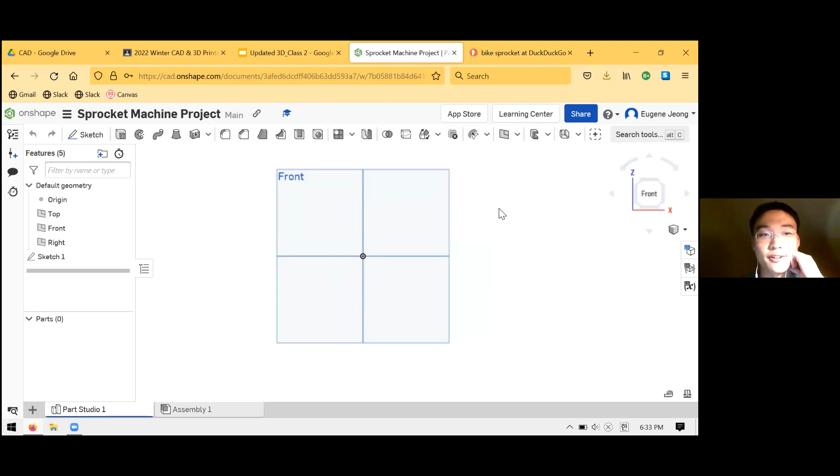What's the first thing that we do when we want to create a part in a part studio? Sketch. Great. Thanks for answering. Feels like I'm in a real classroom or something. So we create a sketch.

I thought we were using the top plane. You could. It doesn't really matter that much. In some senses, the only thing that'll really have an effect on is when you bring your part into your assembly, it'll by default orient it in the same way that you have it oriented in your part studio. So I'll probably just do front, because that'll make it horizontal instead of vertical. At the end of the day, it really doesn't matter. It's a matter of preference at this point.

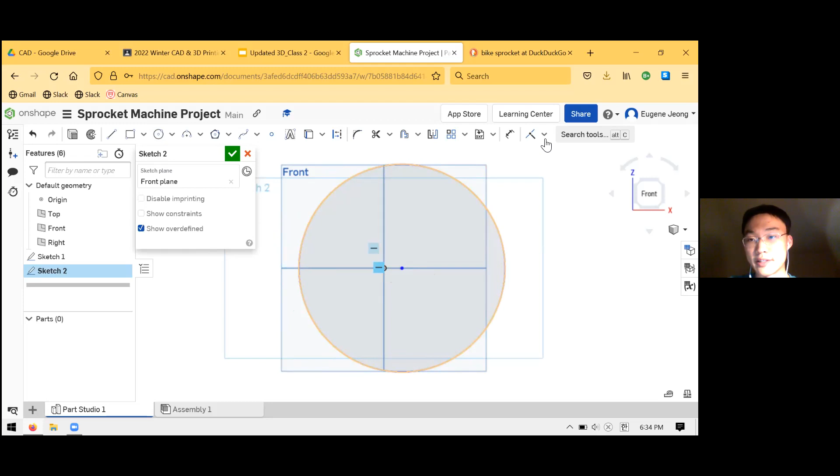And the body of the sprocket, as we talked about last week, it's going to be a circle. You can see I missed the center there, but I'm going to put my circle center on my origin. And that's using my relations, specifically the coincident relation. How big is the circle supposed to be? Great question. On a real bike, you'll probably see it's going to be a couple inches in diameter. It really depends on what the sprocket's being used for. And since this is just a machine that doesn't do anything, it's really up to you. So feel free to pick any number. I'm going to pick some made up numbers. You can use the same ones, you can use your own.

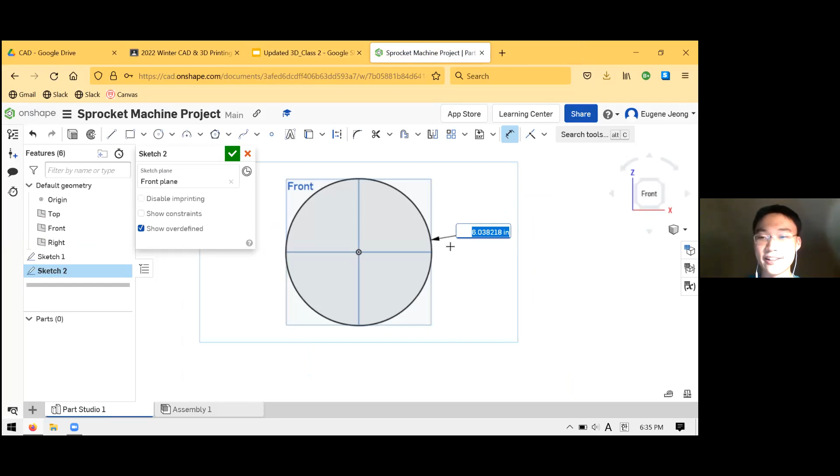It doesn't really matter. The only time the dimensions will start to matter is when we start making other parts after the first part, because then we need to make sure that these parts will actually be able to fit together. And that's where we need to make sure our dimensions are logical with respect to each other. But right now, since we're starting on a fresh new page, there's really no restriction. Maybe I'll make it 3 inches, which would be like this big in real life, thereabout. Wait, 3 inches? My default units are in inches, as I may or may not have mentioned. Mine's so small.

And from here, now we're gonna look towards the second part of the sprocket. Oh, mine is in centimeters.

What you can do, I believe, is specify the unit you want by typing in either IN for inch or cm for centimeter. So for example, if my default units are in inches, but if I wanted to type something in centimeters, I could type in 2 cm, and that will automatically convert it to inches. So 0.787 is 2 centimeters. I believe it also works for meters or millimeters.

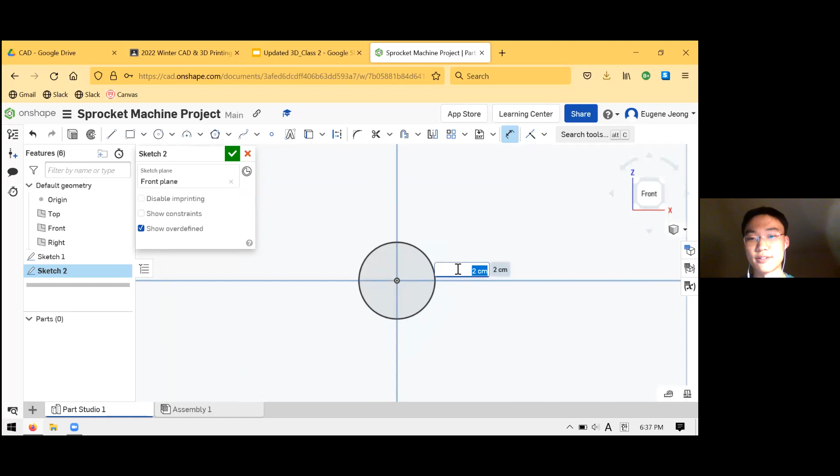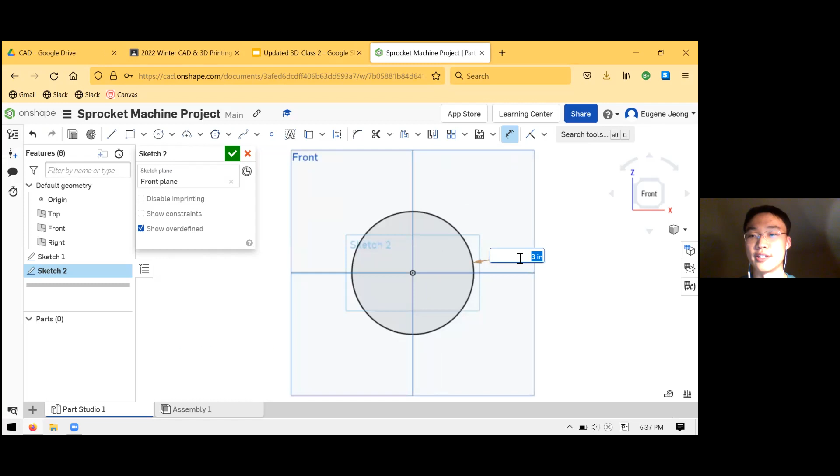3 inches is 7.62 centimeters. Or that was just an example. No, because I put in 3 IN and then it said 7.62. In that case, it probably is that. Let's find out. There you go. 3 inches is 7.62 centimeters. Okay. Yeah. And that's a common feature in most CAD programs where you just type in a unit and you don't have to convert it yourself. The program will just take care of it. So good thing to bring up.

So the next part, now we're going to think about how we're going to put the teeth on this sprocket. The hint that I gave you last week was that we're not going to model every single tooth on the sprocket because that would be really annoying. We'd have to do the same thing maybe dozens of times to create our part, and we'd have to create all those relations, all those dimensions. It would not be worth it. No one would ever design sprockets.

Can you just create one triangle and then when you put it in the assembly, you duplicate it a ton? Almost. It's a similar idea, except the duplication part, as you call it, is going to happen entirely in this sketch. So what we're going to do is sketch just one unit of the thing that we want to pattern, which is the tooth of the sprocket. And that's kind of like a triangle shape, maybe just a pointed part.

And to make that, I'm going to use my line tool. There's a lot of different ways that you can go about this. I'll draw some lines and I'll explain how I'm thinking about it. You're free to try your own method, depending on what feels the most right to you. But for now, let's just try making 2 lines that'll form a single tooth, a single unit of the sprocket.

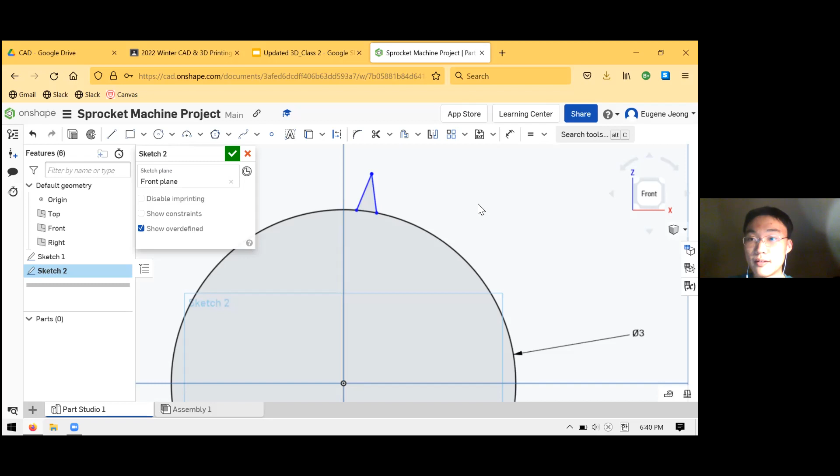I meant, how do I make it equal to the next triangle? Wait, what does copy sketch entities do? I guess it depends. I'd imagine it's similar to a copy and paste function on anything else. So you create a second version of the thing that you copied. Oh, yeah.

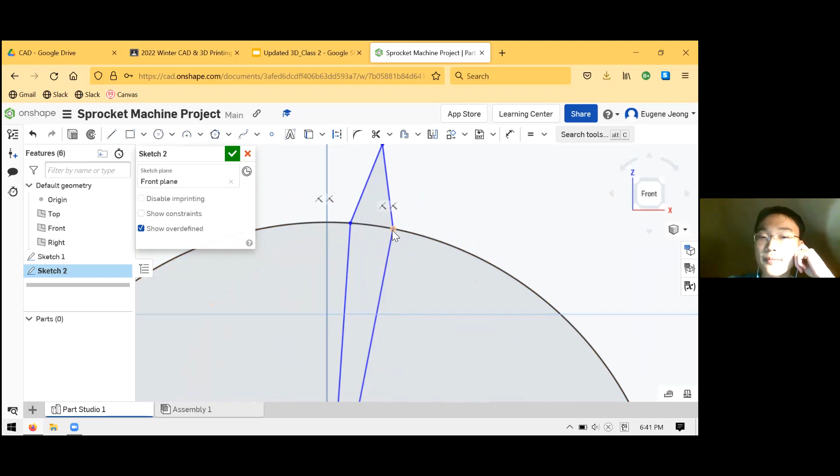So we'll make one of these triangles, and then I'm going to do something that may seem a little odd, but I'm going to create another pair of lines that go from the center of the circle to the points on these triangles where it meets the circle. So I kind of created a bit of a kite shape here. Why do you have a kite shape? And the reason I do that is... So are we supposed to make a kite shape?

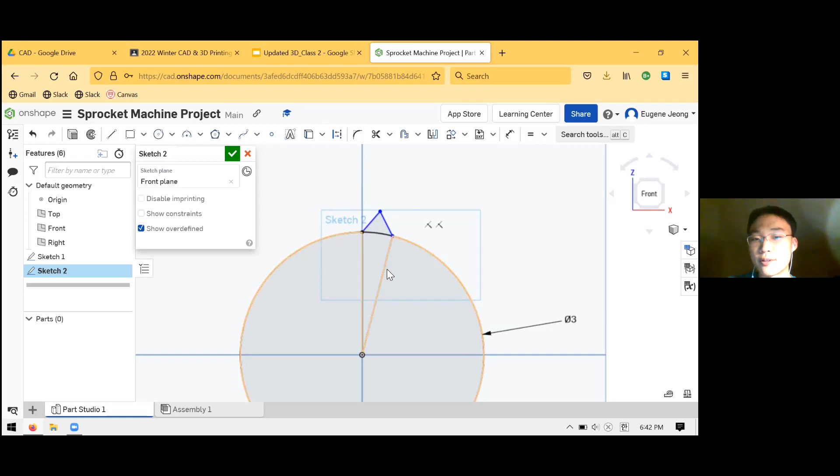Yeah, if you don't have an idea of how to make the whole thing, I'd suggest following along and seeing how you feel about it. If you have an idea and you think you can do it, go ahead. Feel free to do whatever you want. Do the kite? Yeah, and what I'm going to do is take these bottom lines that I drew, and these are going to be my construction entities. So I'm going to use my construction tool. I'm going to first select those two lines and make them construction lines.

And as you recall, the purpose of these construction lines is to create a reference, right? It's not going to be part of the final part geometry. It's not a boundary of my part. It's just a line that I'm creating for my own convenience so that I can use it as a reference to create dimensions, for example, and things like that.

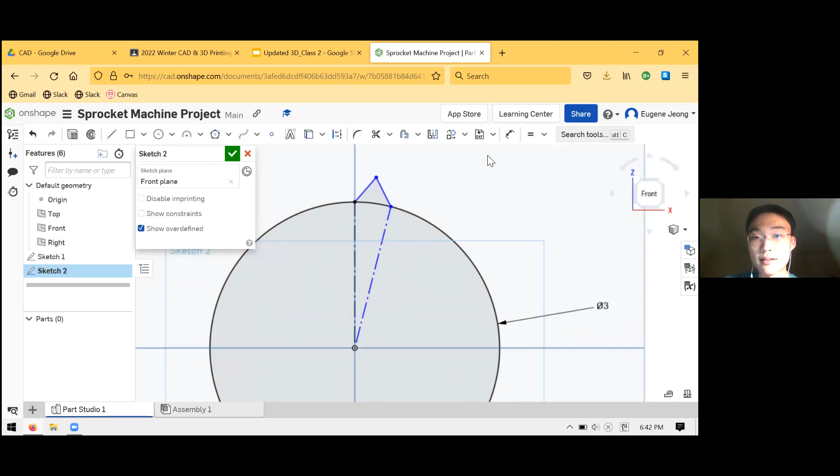And the reason I created these construction lines is because I want to dimension this angle. And I can put in any number I want. And you can imagine it's easier for me to think about this in terms of angles, right? If I just created the dimensions, maybe like an X and Y dimension for this point, for example, what would happen is I'm not really sure how many of these sprocket teeth will perfectly fit into a full 360-degree circle.

Instead, if I use this angle tool and tell it how much of the circle the single tooth should take up, then I already know before I even start that there's going to be, 360 divided by 20 is 18 teeth, for example. Say I could also make this like 36 degrees, make a really wide tooth. This would not be a very useful sprocket, seeing as the tooth is so wide.

I don't understand how to make the kite shape. Sure, all I did there was use the line tool. So just like we drew arbitrary quadrilaterals in week 1 and 2, I just take my line tool and I do something like that. Except, of course, this point I put on the origin, and these points I made sure were on the circle.

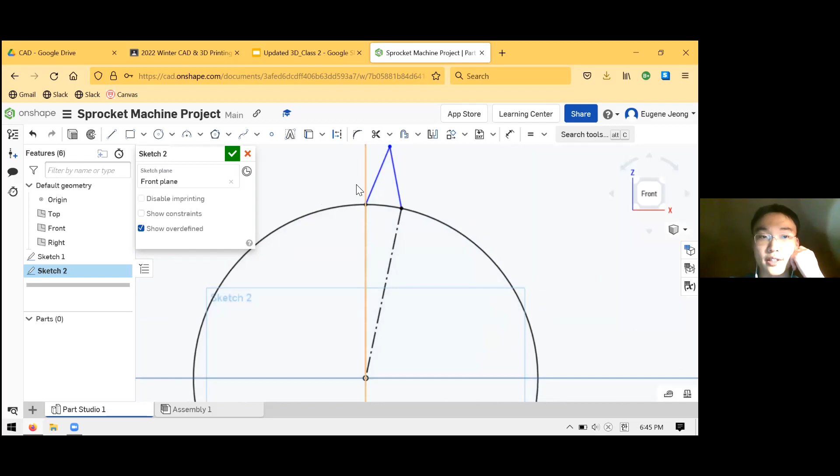So that's that. And the last thing is how big this tooth is going to be, right? So I'll need another dimension for that. Remember that I already made these two lines equal to each other, which you should probably do because it's going to be true for most real sprockets. How do you get it to say the degree measurement?

All right, so the dimension tool, it's the same one that you always use. It's D on your keyboard or this one in your toolbar. And the way we tell Onshape that we're trying to make an angle dimension rather than a length one is just to select two lines, one after the other, that are not parallel. But mine's not turning black. So if these are not black yet, I'm in the same boat.

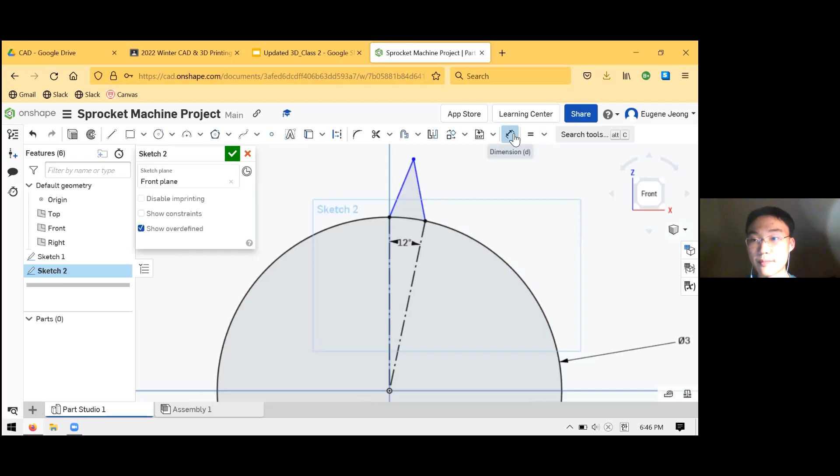And if these are not black, potential causes are maybe one of them is not vertical. What do you mean? One of them is vertical. Make sure that it has a vertical relation on it. Like, do I just click it with vertical? You can do that, just to be safe. Maybe it is already vertical. The other thing I'd check is to make sure that the endpoints are actually coincident to the circle using your coincident relation. Okay, now it's black. Yay. And as I was saying, the last thing I'll do is just dimension the tooth.

Can I make mine 10 degrees? You're free to do as your heart desires. I won't stop you. I can't stop you.

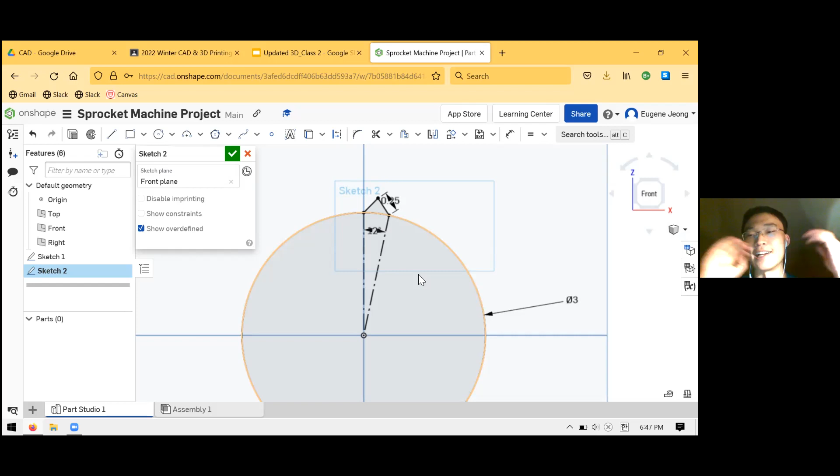And so after I put a dimension on the tooth, in this case, I did the flank length of the sprocket tooth, and I just gave it some arbitrary number. The length of a sprocket tooth is 0.25. In reality, this would not work at all as a sprocket, just because it really doesn't have a way to grab the pins of a chain. But I'm doing this to give you the general idea. And if you want to create a more realistic sprocket, there's plenty of textbooks and papers out there regarding the proper curves involved in a sprocket tooth.

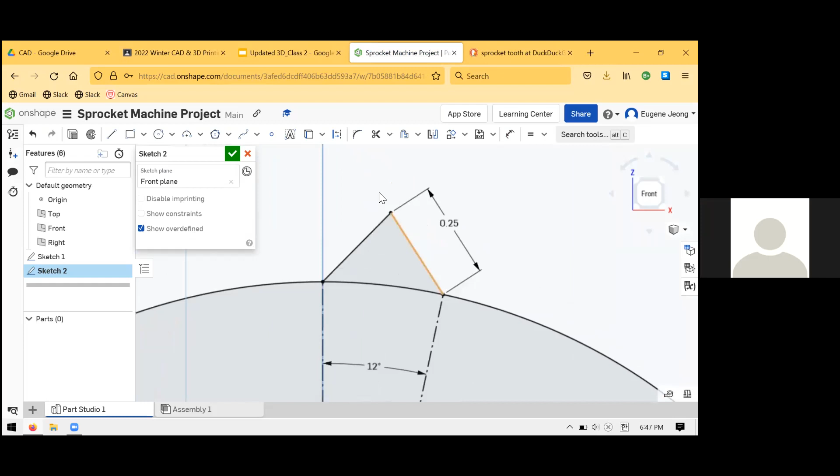What is the 0.25, how much it actually is? I don't know what you mean by actually. This is just what I had made up because it looks pretty good in my opinion. But how is yours so flat? Mine is really, oh, it's because you have 12 degrees. Oh yeah, that makes more sense. All right, you're free to choose your own numbers. Just make sure, yeah, don't worry about it.

All right, so it's 0.25 inches, right? Yeah, if you're using inches and are using a similar set of dimensions to what I'm using. Yeah, as an aside, if you're actually interested in modeling realistic sprockets, there's a lot of interesting math involved. It seems from this cursory search that they have what's called an involute profile.

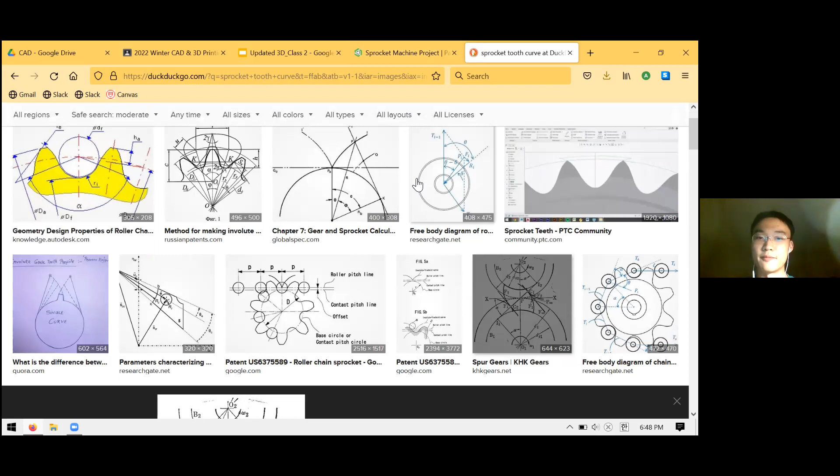An involute is a curve that has an interesting property where if you have two meshing gears, for example, or in this case a sprocket, if you have two gears that have involute profiles, you're going to get a constant velocity between the two gears. So it would be possible, for example, to create a spline and fit it to an equation. And if you knew the equation of the involute, you'd be able to accurately model what a real sprocket tooth would look like.

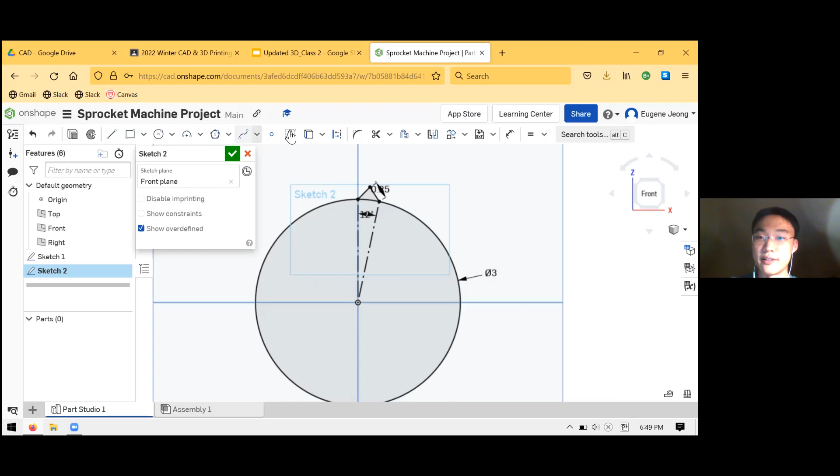Wait, what does the spline do again? Oh, the spline. Oh, this annoying thing. Right, that annoying thing. In most CAD programs, you really use it to fit specific curves. For example, if you wanted to put an accurate involute curve in here, you'd probably use a spline tool to fit the curve. I'm not sure if Onshape has an equation-driven curve feature.

How do you stop using it? I can't stop using it. Usually you can stop just by hitting escape on your keyboard or just hitting the tool again. Oh. Yeah, for those reasons, I'd suggest maybe not using that tool. Why is the spline so?

All right, if everyone's caught up to this point, we're going to do a little bit of magic, and that's going to be using our pattern tools. Before I introduce this, I'm going to show you today two different ways that you can create a pattern. The first way is called a sketch pattern. It's great, but it'll have some drawbacks that are going to come up later. Then I'll show you an alternative, called a feature pattern, which happens one level up, in the 3D workspace, and that one is a little bit easier to work with.

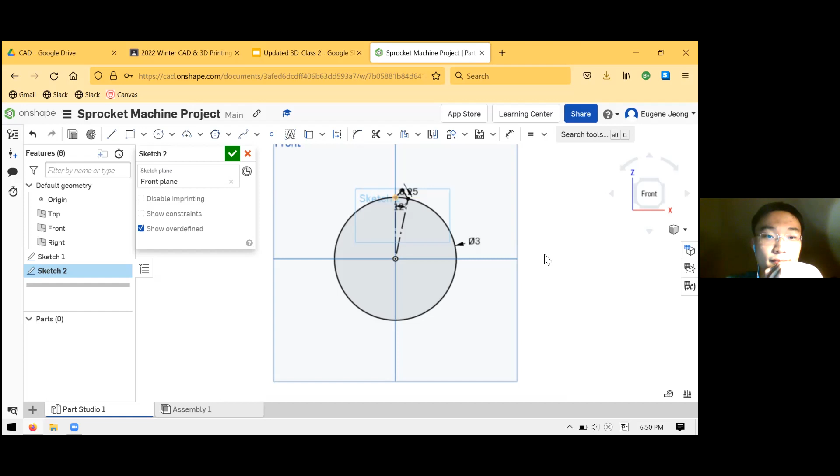All right. So what we're going to want now is to select the pattern tool, and it's been a minute since I used this, so I'll have to look for it. Here it is. It's going to be towards the right of your toolbar. It might not by default be at the pattern feature, but if you do the drop down menu, it's going to look like this one, a pentagon made out of circles. It's called circular pattern. It might be hidden, but it's there.

What does the sketch fillet do? Does it just make the edges circular? Because it looks like a triangle and then it's carving out a bit of it to look like part of a circle. Yeah. If you remember, in our 3D space two weeks ago we used the Fillet Tool, right? That takes the corners you select on your 3D objects and rounds them out, like you sanded them over. A sketch fillet basically does that, but while you're still in your 2D sketch, it turns that sharp corner into a rounded part. Oh, okay. So when you turn it into a 3D part, it'll already have the fillets.

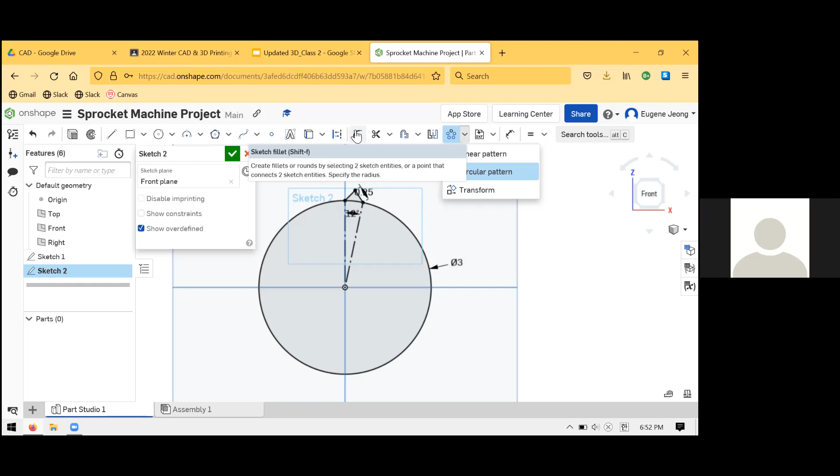Some people like these. I personally am of the opinion that you should avoid them just because it tends to make your sketch complicated. And that's the same reason that I'm going to show you how to use the circular sketch pattern feature, but I'm going to recommend that you use the feature pattern rather than the sketch pattern. Anyway, here it is, circular pattern.

Click on it. You know the tool is active as usual because it's highlighted in your toolbar. And the way you're going to go about this is, let's see, I believe you select the two entities which we want to pattern. That's our sprocket tooth, so those two lines.

You can see now I'm kind of dealing with the interface of this sketch pattern tool. So it's going to be a bit confusing. It's not quite like anything we've worked with before, but it's not too bad. You can see there's this white arrow that goes around, and there's a preview, like a faint shadow of the things that it's going to try to create. You can also see a number that shows up, and that's the 3x little box here.

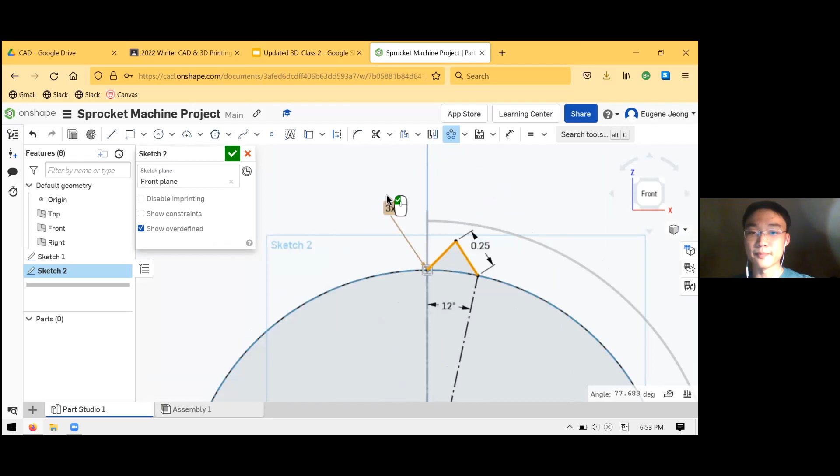Wait, can't you use this tool to duplicate everything? Right, we're using the circular pattern tool. Can I just left click now? You can, but I would suggest changing this number. This is the number of instances, from 3 to something a bit higher. 360 divided by 12 is 30.

Almost. Aw. Actually, yes, I don't know what I was thinking. Yeah, you're right. It's a late night. How do you change the number? You can double click it just like a dimension, right?

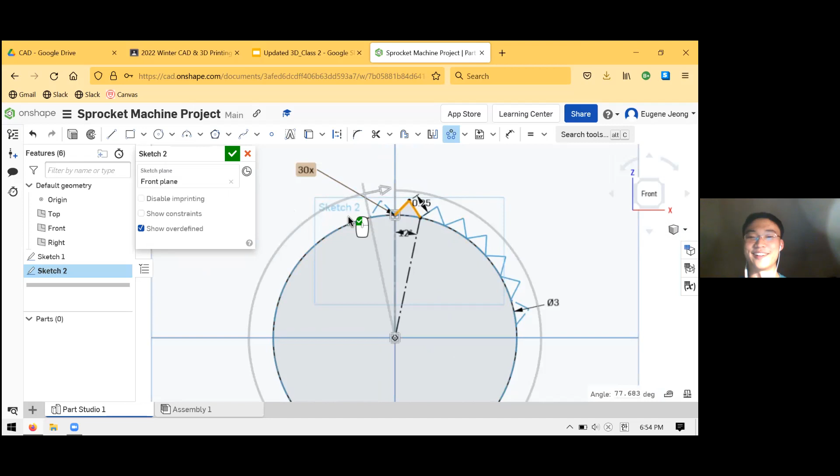Okay, 30. Why does it only do it like 1, 2, 3, 4? It only does it like 7 times-ish. That's kind of a limit of the preview. You can see here the last one is dotted, and on here the last one is dotted again. Is it like where people write numbers and don't want to write the entire thing, like dot dot dot? Right, just imagine that they're there.

Right, that's the idea. And so now we're going to hit left click, which you can see on your cursor. The left click has a check mark on it. Okay, yeah, there's a ton of spikes. Now we have a ton of spikes, as you say. And the problem is, why are they all blue? They're all underdefined, even though we defined our first one. And you don't have to define them all.

That's the thing. If we had to define them all, this would not be much of a time saver because we'd have to do everything again anyway. And so if everyone works on their own, they can do it in at most 10 minutes, I suppose.

If you try clicking and dragging one of the points around, what you'll see is that there is this center point here. And that center point is the center of rotation for your circular pattern. There's no reason that the origin of your sketch has to be the center about which your pattern is formed.

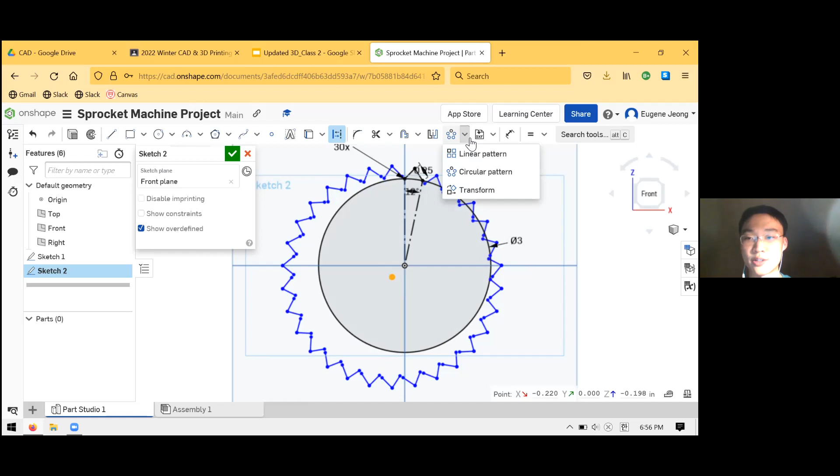For example, you might be designing a part where you want circular symmetry of some sketch entity about another point. Maybe you're making 4 different sprockets, one in each quadrant of your coordinate system. In that case, you'd want the center of your circular pattern to be somewhere else. And that's why Onshape does not by default set your circular pattern's center, its axis of rotation, to your origin.

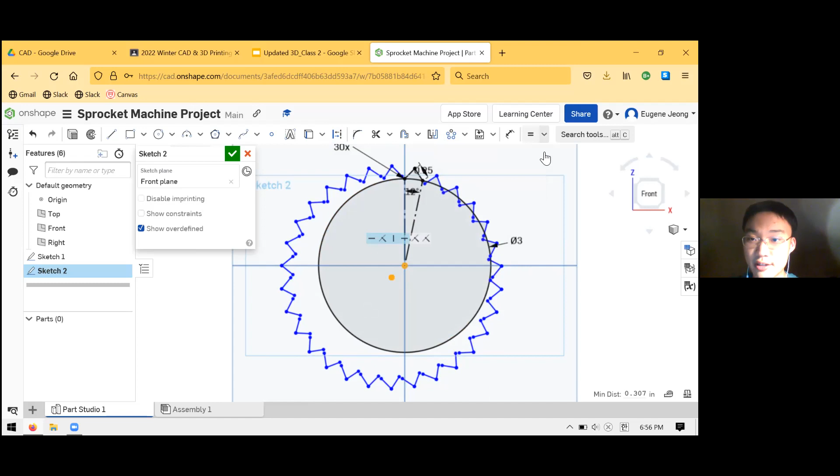And so all you have to do is click on this center of rotation. You can find it by dragging out one of the blue points, which will reveal the center point. Then click that, click your actual origin, and use the coincident relation to put them together. And once you do that, everything breaks. What happened? Let's figure this out.

You said everything breaks as if you want it to break on purpose. Yeah, that's not quite what I want. Right now I'm not sure what's happening. Usually this works. So let's take a step back. I will just undo. It's possible some kind of weird relation was created unintentionally. Whenever I'm in doubt, I just go back and redo the thing that I was doing.

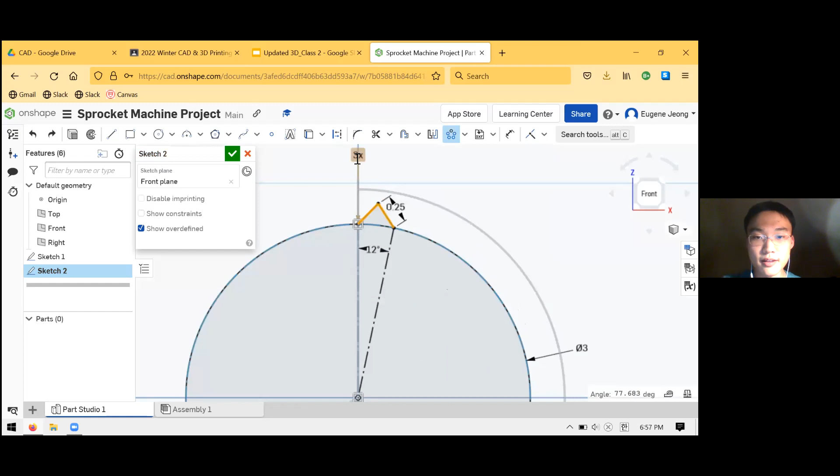So I created my thing and make 30 of these. Whoops, I hit escape.

So can I try to do it? Yeah, go for it. Maybe you'll have better luck than I do. So I don't click it before I do the coincident tool, right? I'm not sure exactly what you mean, but ideally this is what's supposed to happen. Yay, it worked. So everything... I'm not sure what happened before, but now everything should be black. Yeah, everything is black. Great.

And now you can see we've created our sketch with almost no effort. We have 30 teeth. We've made like a little cartoon sun shape. It's not a realistic sprocket. It's missing 2 eyes and a gummy smile.

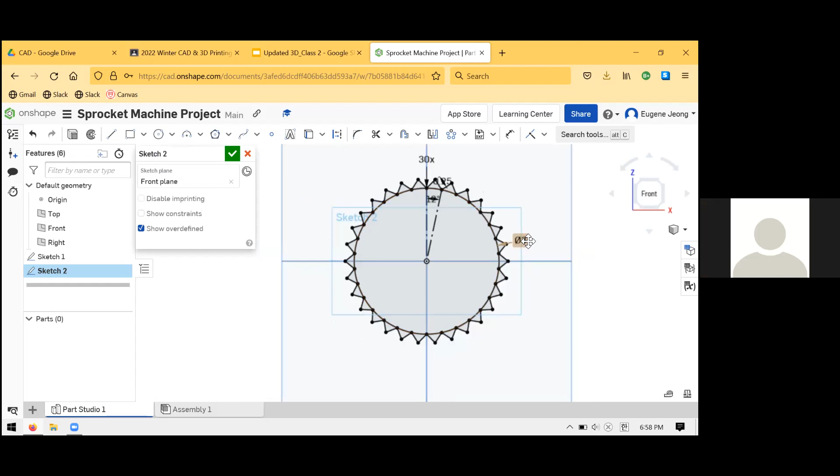Do you have a question, Jeffrey? Yeah. How do you duplicate them all again? Sure, I'll go back and show you again. Circle pattern. Because as we just saw, even I can have trouble with it sometimes. You click the circular pattern feature, which hopefully you found in your toolbar, and you select the 2 things that you want to copy, which are your lines for your tooth.

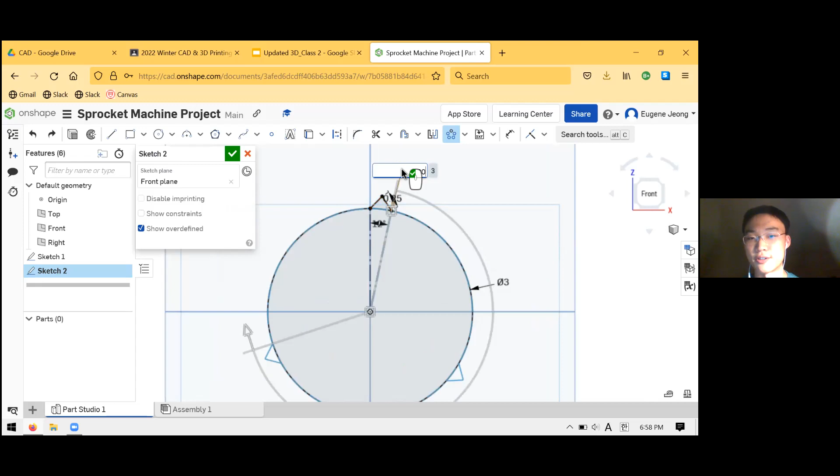Then this brings up this interface. This stuff all does something. This will control where you start. This will control how much of the circle it'll pattern it over. But don't worry about those. The defaults are what we want. And then you double click on this number, which is the number of instances, and you change it to any number that you feel is appropriate. You left click somewhere in the background, and that will confirm your use of the tool.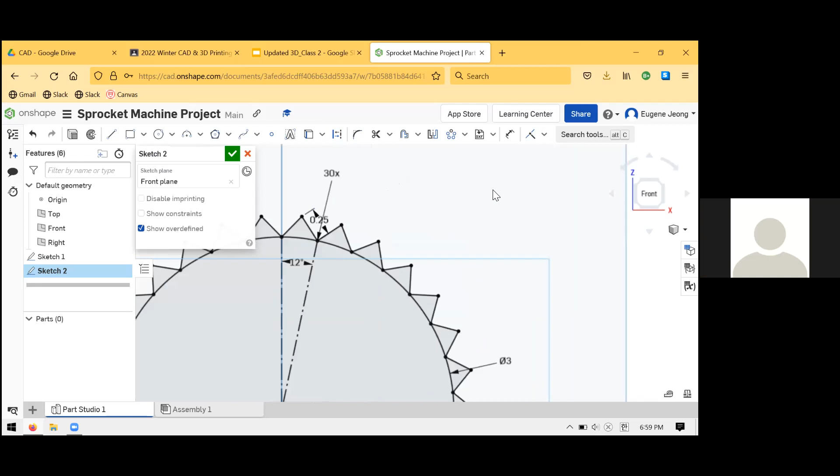And then you fully define it just by bringing out this point, which is the center of rotation of your circular pattern, and you make that coincident to your sketch origin. Henry, do you have a question? How do you make it not triangle-y and more rounded? That is a good question. So how do you think you would do it?

Let's take a step back before we made that whole pattern. Let's see. I don't really know. Right, so at this stage, before we pattern everything... once we pattern everything, we're only going to get multiple copies of the thing that we already had. So we're going to have to change something at this step.

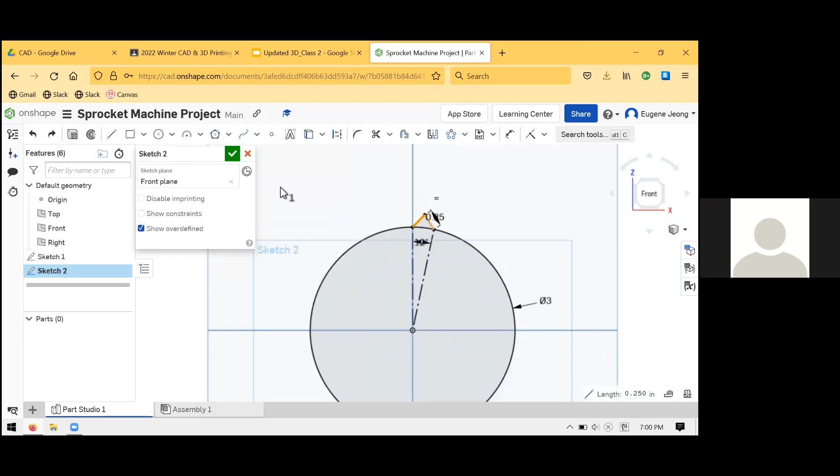How do you unpattern? I just undid my pattern with Control Z. You can just select everything and delete it if you need to. What you might be able to do is delete the pattern relation. I'm not really sure. It works different in every CAD program, but for reasons I'll show you later, sketch pattern isn't even the best way to do this, in my opinion.

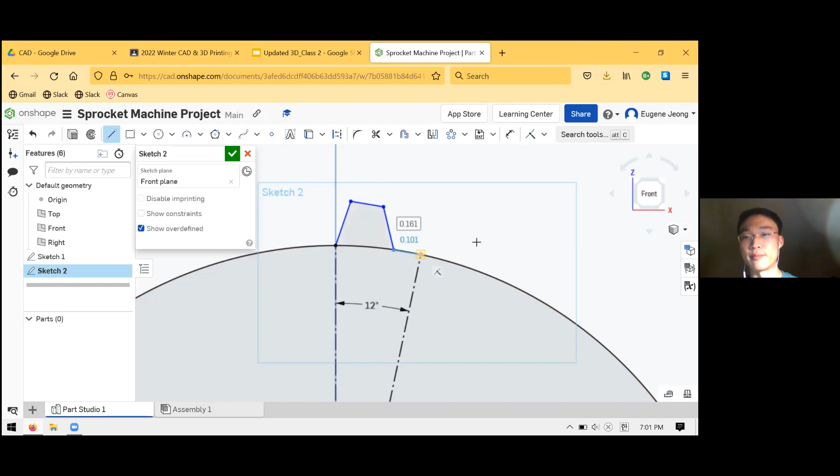But to answer your question, if you don't like the triangle shape, which is understandable as it's not really that accurate or good looking, maybe your unit cell can be a different shape, right? I won't go to the trouble of fully defining this, but hopefully with the skills that you have, you're able to fully define it. For example, my unit cell, the thing that I'm going to pattern, I might want to make it look something like this. Maybe like a trapezoid, and maybe I want another gap between my trapezoids.

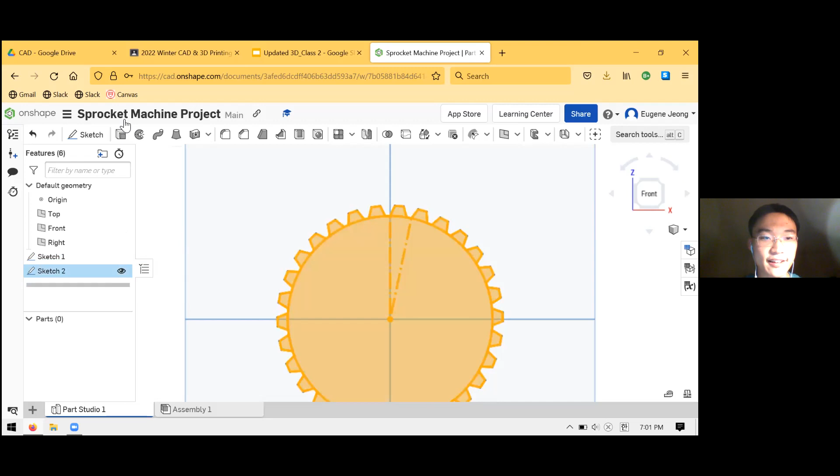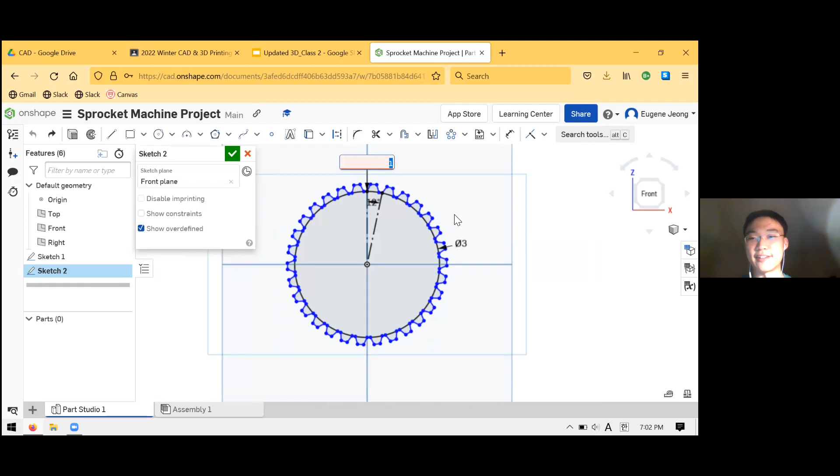You can see if I pattern something like this, and I selected these guys, and I'd select that, the shape I would get would be slightly more realistic, right? Whoops. I'm not sure why I had two sketches there. Can we do that? For the time being, if you want to do this on your own... So we're not gonna do it right now. I'd say just stick with the circle for now, and we'll move on with the demo.

So is this how you make it circular-y? So you do something like this. You just make your unit cell, the first thing that you created, the shape that you want. You can fillet these, for example, if you want to make it rounded. You could do the whole profile using some combination of arcs or splines, but for the sake of simplicity, we'll stick with ours. Is there another way you can round it other than that?

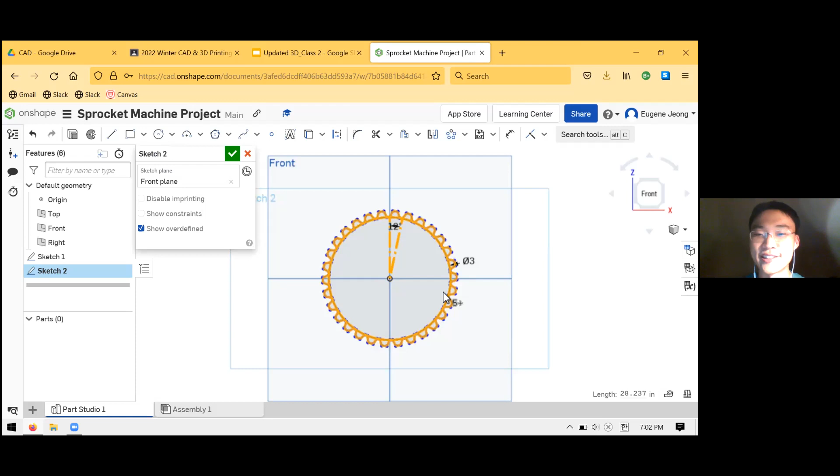I'm not really sure what exactly you're looking for in terms of rounded, I don't know what part you want to make rounded, but with the tools that we've learned so far, I'm sure you can find a way to do it. Like the one in the bike drive where the tips of the triangles are partly circular.

Right, so what you could do is use your lines, for example, and draw a shape for a single tooth, and you would draw this over here instead of the triangle, right? You draw your shape. Okay.

Are we supposed to go back? Are we supposed to go back to like the full circle thing now? So what you'll do now that you have this sketch, right? You can go to your 3D workspace, hit check mark on your sketch, and what you can do is extrude it. What about the inner circles? We'll do that in a separate feature, and I'll use that to demonstrate another tool.

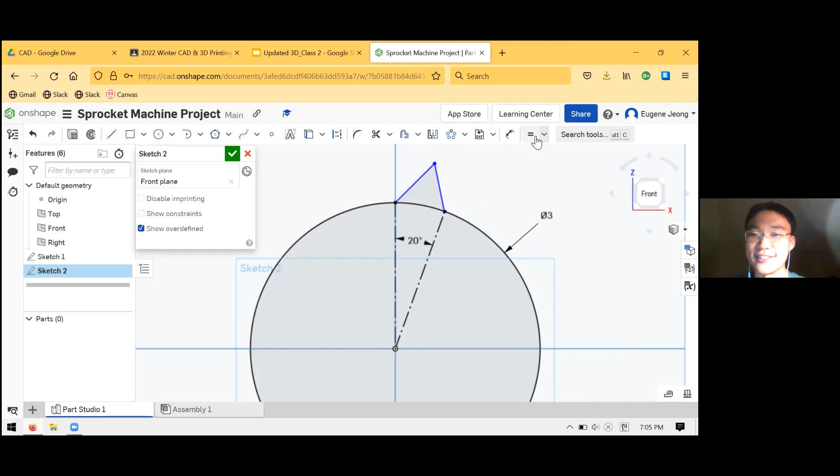Okay. Now I need to do the circular thing again. And then multiply this by 30. Yeah, multiply. Yes, please. Thank you. Question, how do you make it all black again? I forgot. Right, so I ended up redoing mine because I don't remember how to delete the sketch pattern. But what you'll probably need is to make them equal. Oh, the constraint thingy. I remember now. Click, click. Okay, yay, it's all black now.

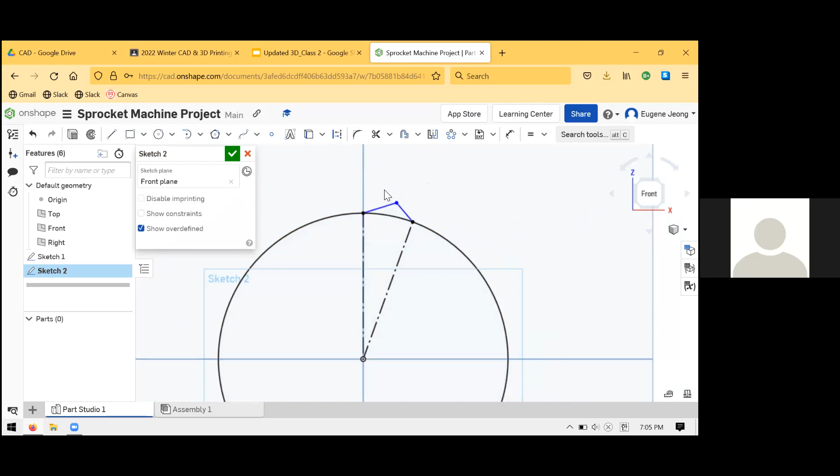Extrude. Wait. First go to sketch. Complete the sketch. Extrude. Complete the extrude. Okay, it looks so weird. It's just a thick layer of a circle with triangles on the outer edge.

All right, so let me catch up real quick. And what you'll find when you do this, when you extrude, you recall that whenever we had multiple sketch profiles to choose from, when you're selecting your sketch regions for your extrude feature, you have to click every single one of those triangles, basically. And that's kind of not what we're going for here. We're trying to do things fast and quickly.

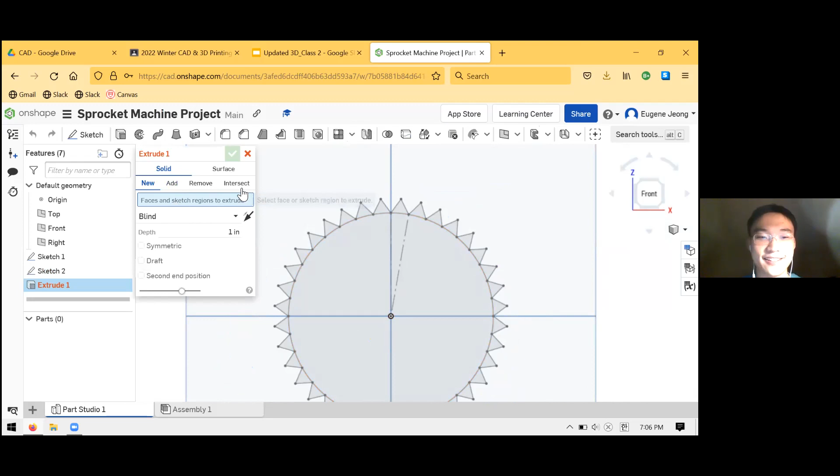Where are the circles again? What do you mean circles? Like, weren't there circles inside it? Oh, the pockets we will do afterwards. The first point I want to make is that if you use the sketch pattern feature, what you're gonna have to do is click every single tooth. And even though for this, you could do that and it'll only take you a couple minutes.

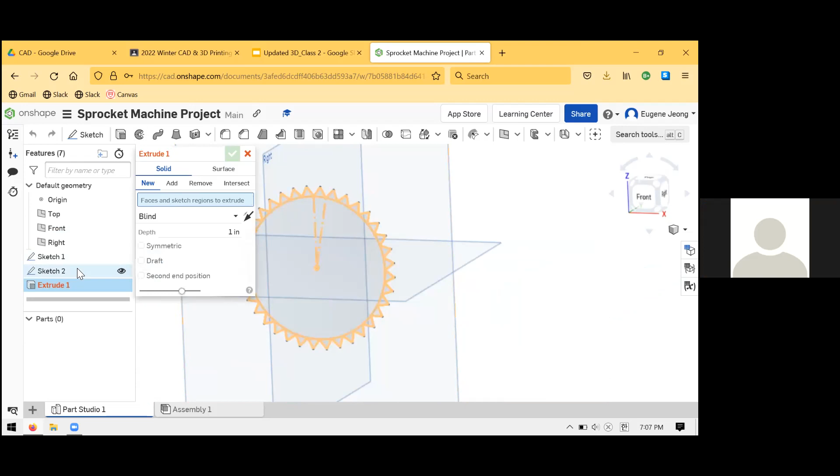No, I can't imagine. When I did my extrude, I didn't have to do anything. Interesting. It just came up like, yeah. So then I changed it to 1 centimeter in width because then it looked better. So that's basically all I had to do. Right, okay, so yeah, it turns out you can actually just do that.

So what you do is you take your extrude tool. Instead of clicking regions, you can actually just click on the sketch and that'll bring up everything. Oh, I did that on accident. I was trying to go to my extrude, but then I forgot to click the check mark on my sketch. So I went back to my sketch to click the check mark, and then I went to my extrude, and then it was fully finished.

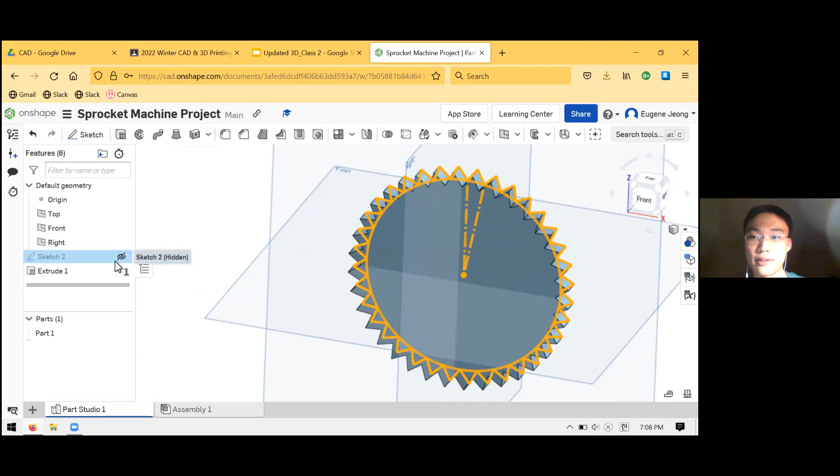Right, so yeah, that's actually pretty good that you discovered that. So when you have the sketch selected already and you hit extrude, I think it might automatically populate the field with the previous selection that you had. So actually, yeah, this works. And so you can make the sprocket like this.

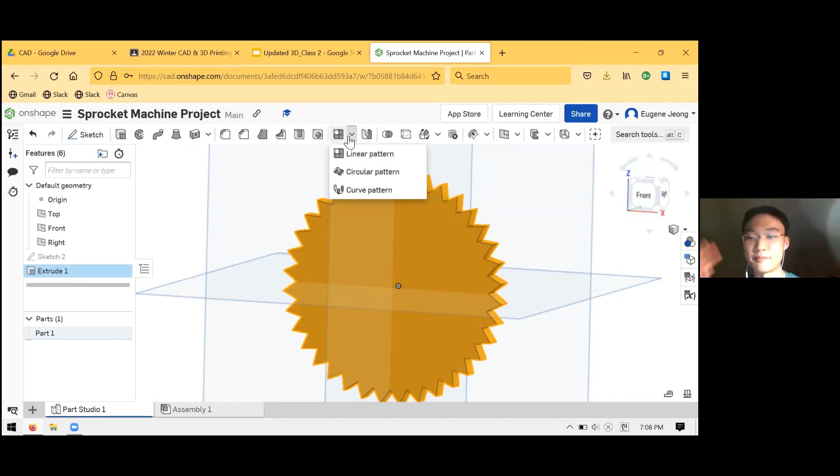What I was going to suggest is you can also use a circular pattern feature. So I guess no need to follow along for this one. I'm just going to show you and hopefully put the idea in your minds that this is a thing that exists, but don't worry about it. Let's say, for example, that instead of doing that, I just extruded the circle. And let's say I made another extrusion that is a single triangle, right?

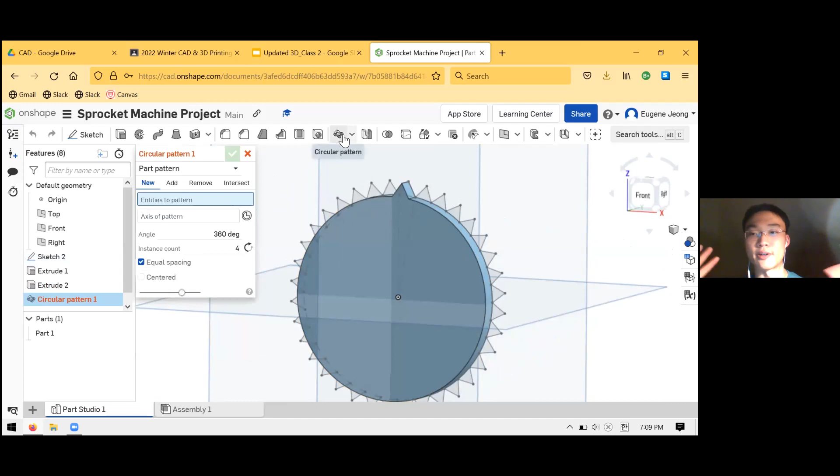Now, what happens is I can do pretty much the same thing that I did before. It's just that now the pattern is occurring at the feature level instead of at the sketch level. And so for entities, I select the part that I want to copy.

And for instances, it's the same idea. I type in 36. For your axis of pattern, you can just select the outer circle. You can also select, I believe, cylindrical faces, or you can select lines. But in this case, you would need a line that goes through the axis of your sprocket, which I don't have. And so it's the same idea. It's just a lot more convenient to change later because I have this whole entity in my feature tree now, and I can just go back and edit it.

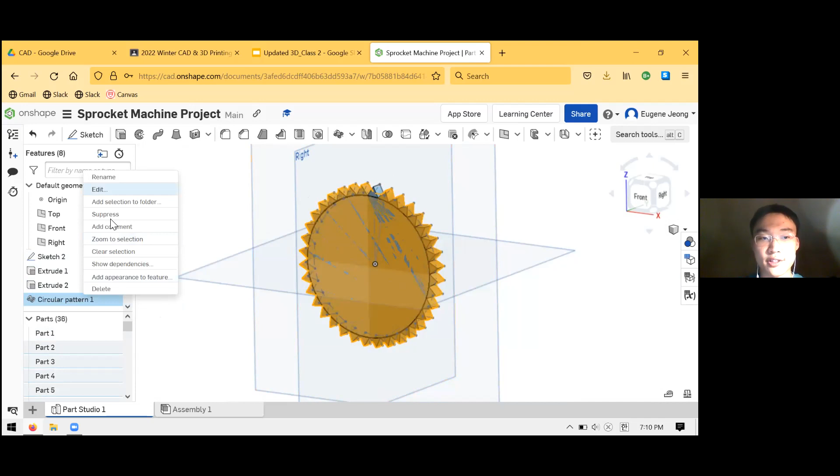Maybe I only want 30 teeth in my sprocket. I can reduce the number just by changing a number here instead of going back into my sketch. Your spikes are 10 degrees. I may have changed it. It may have been something different before. Because you did it 36x. I only did it 30. I probably ended up changing a number somewhere in there. Don't worry about it. Yeah, it is 10. It won't matter.

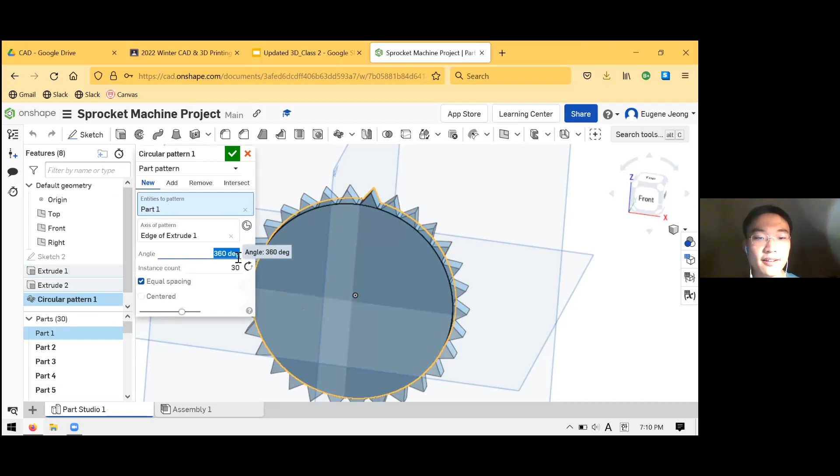And so the idea is, it's harder to edit a sketch pattern than it is to edit a feature pattern, just because the feature pattern has its own dialog box. It's easier to see where you need to input things to change it. So that's the idea. Just know that it exists, but you don't actually need to use it in this case. So don't worry too much about it. Just know that it's there.

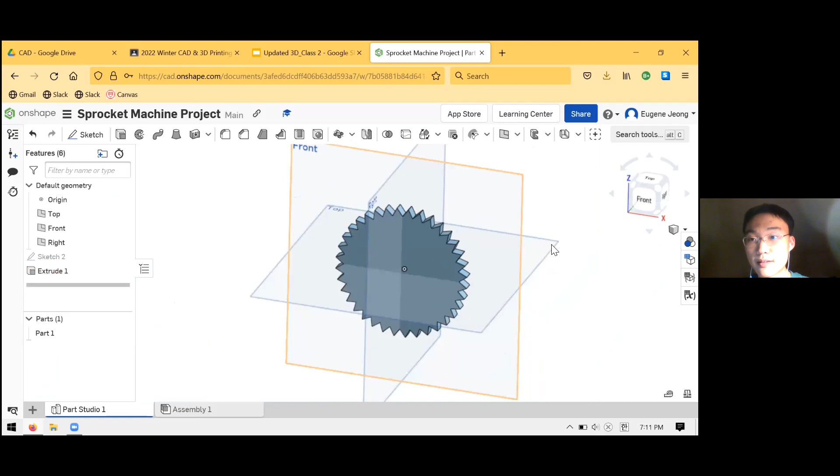Inner circles? Right, now we're gonna make those. I wish we just made a few circles on the sketch and then all we had to do was click, make them not filled in. Yeah, so actually you could just do that. If I make a circle there, it'll come up as a hole in my part, right? And the only reason I'm not going to do that is to show you a new feature. So let's go back, and I'm going to create another sketch on my front plane. And this time the sketch is just going to be the pockets that I want. So for the sake of simplicity, let's say they're just going to be circles.

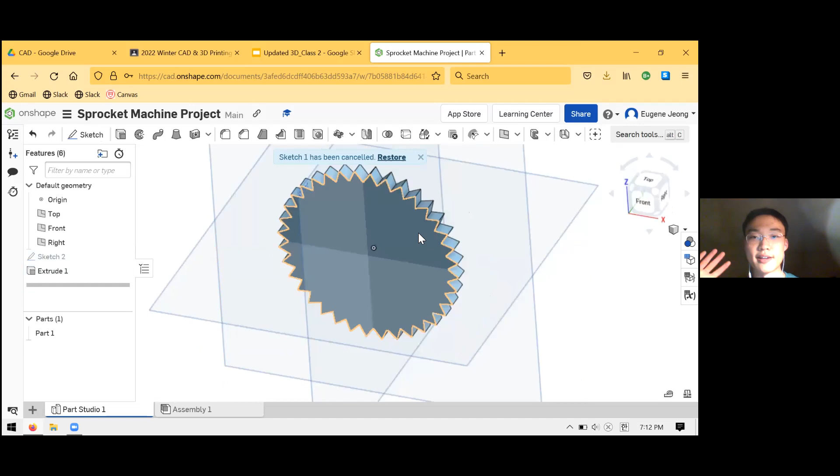How are you in a sketch and it's fully defined? My sketch is not fully defined. The only thing in my sketch is the circle, and the circle is blue. No, I'm saying, how are you in a sketch and you still have that 3D thing? Oh, I made a new sketch. So yeah, you can have as many sketches as you want, and your sketches can be in different planes. They can be in custom planes that you make. Maybe I didn't make that clear before, but you can always create a new sketch if you want to. And you should always be careful to know which sketch you're working in, because that can sometimes cause problems. But what we're gonna do.

So we are making circles, but how do we make it even? Yes. Oh, okay. So let's say I do something really simple, just like that. Uh-oh, what's happening? We're supposed to do that, right? Right, I do want you to make some pockets on your sprockets. But I thought there was a pocket in the center. Right, that is true. So we can also make the center bore while we're here. But don't you think that the side one is too close to the middle one? Yeah, it probably is, and it's pretty easy to change that. I'm just tossing some numbers in to see what I'm working with.

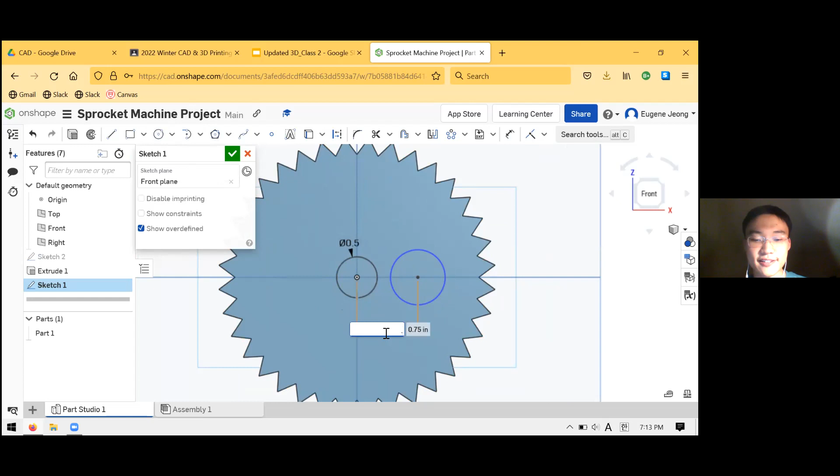So just make up whatever numbers you feel like. Maybe I'll make this one a bit smaller until you're happy with how it looks. And we're going to do another sketch pattern using the circular pattern tool. And I'll just go ahead and make a few copies of just the outer circle. And so hopefully you've gained some experience and you can do this on your own and it all works and it doesn't turn red and say that it cannot be solved, and instead just becomes black and is happy.

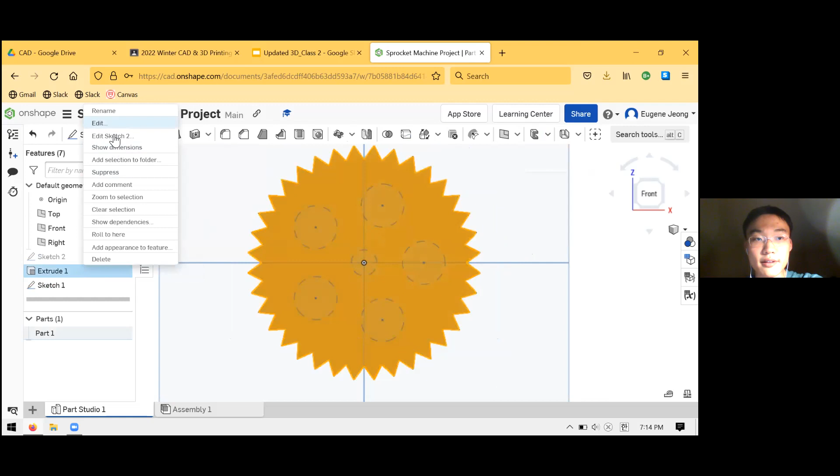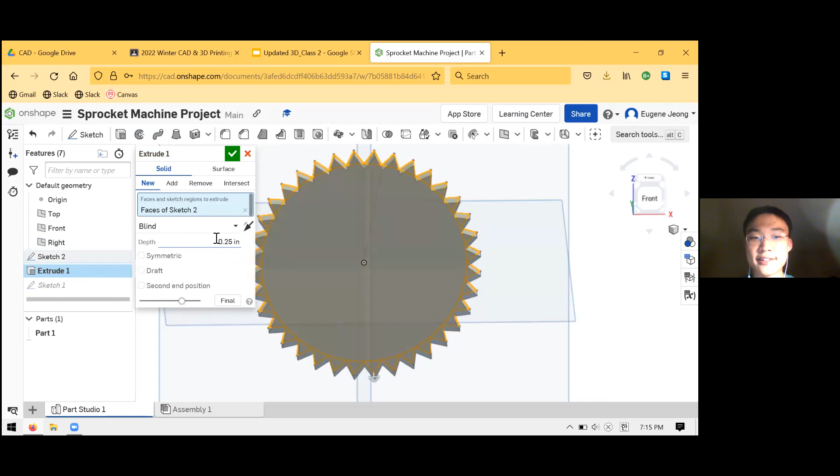One thing for when you extrude it, you extrude the circle, right? So when I did this part to extrude the whole sprocket itself, if you select just the circle, it's just going to extrude the circle. Oh, okay. Yeah, so what you want to do is just click on sketch 2 in your feature tree on the left here, and then it'll select everything that's in that sketch. Oh, okay. And then extrude it.

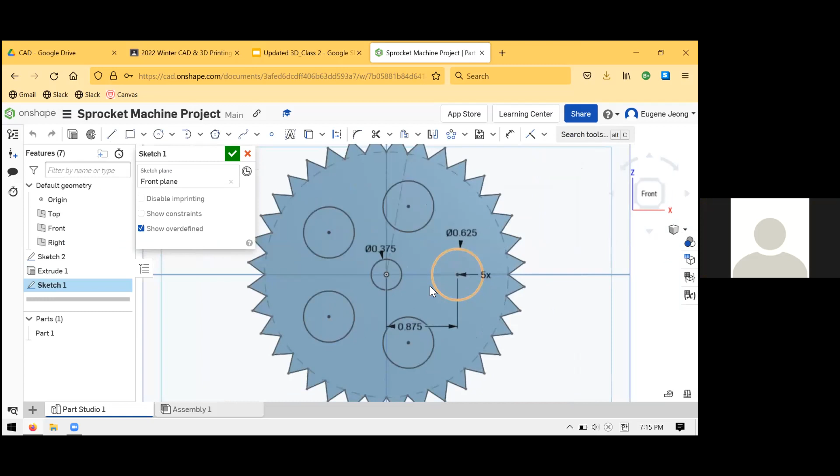And so once you've made this next sketch, which is a bunch of circles, I want you to have one central circle in the middle, and that's going to be the bore by which you hold your sprocket. And the other ones are just pockets, perhaps decorative, not strictly necessary holes that we put in there. How do you make holes in random positions equal to everything else? So if you're talking about these circles, I use my sketch pattern here, my circular pattern. Oh, okay.

And so the new tool that I'm going to introduce, it's another 3D tool, and it's not really a new tool. It's the same old extrude tool. We're just going to change one of the options a bit to make it do something slightly different. So,

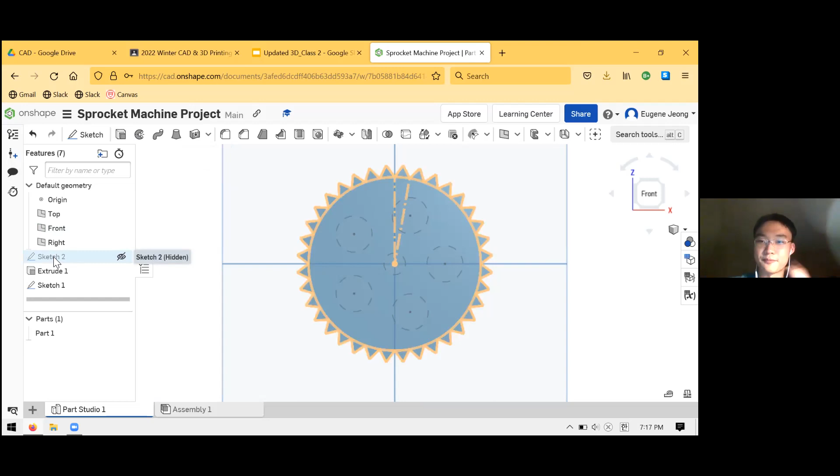like as was pointed out earlier, someone said you could just draw the circles in the first sketch that you do, and it just won't extrude that part, right? It'll create the holes, and that works. And for the most part, there's no real reason you couldn't do that, but sometimes it is good to have different features of your design in different sketches for the sake of readability, right?

Just like we use construction lines to make our sketches more clear, especially to other people who might look at our CAD, it's sometimes good to have different sketches for different things. So like one sketch for the actual sprocket, one sketch for the pockets. And that can be clear for someone, especially if you actually name your feature tree items properly. So I could call this my sprocket and teeth sketch. I could call this my pockets sketch.

All right, so once you made that pocket sketch, we're going to open up the extrude tool again. And here we're going to change one of these things here. So by default, we've been using new and sometimes add. And so new and add, they create material, right?

Why are these not turning black? I don't know why these things are not turning black. If your first circle is black and the patterned circles are not black... Oh, wait, never mind. I got it. Great.

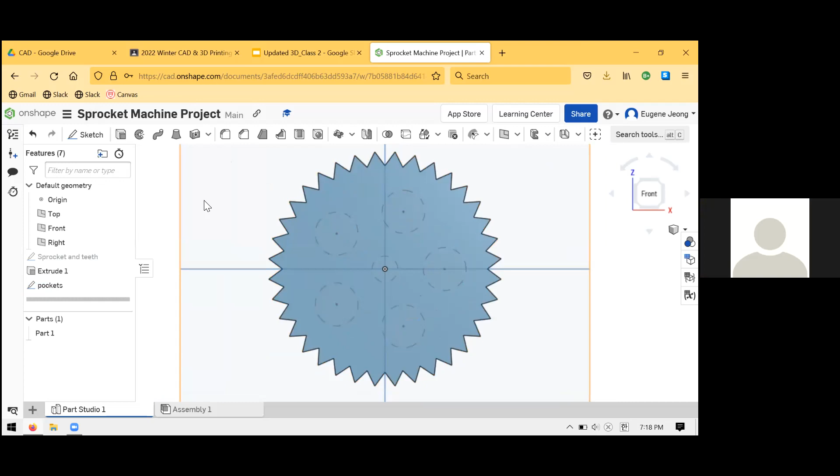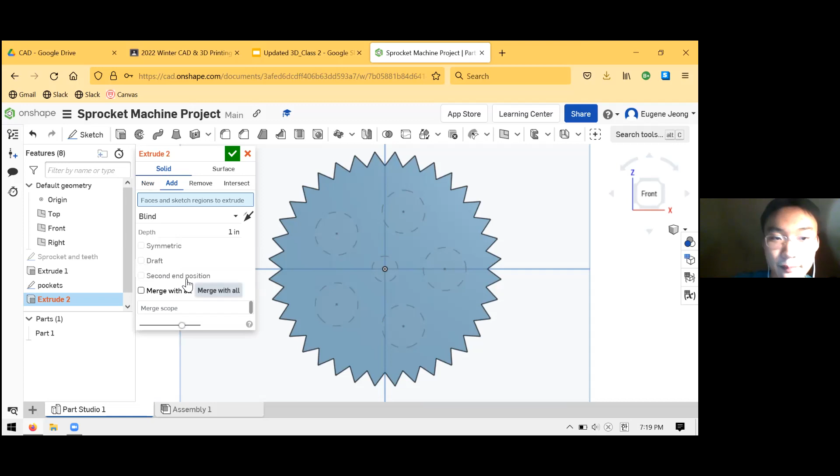All right, so as I was saying, extrude, you have new, which is the one that we use by default. Whenever you make a new 3D object, it's always going to be new. Add is what you use when you want to create another thing, right? Onshape will select this one by default generally whenever you're going to be using it. So basically, instead of creating a new body, my guess is that it's basically the same as merging the new extrusion that you make with what you had before. Although I'd have to play with it a bit.

What we're actually going to select here, though, is remove, which is the third tab here. And as you can imagine, what remove is going to do is kind of the negative version of what the normal extrude does.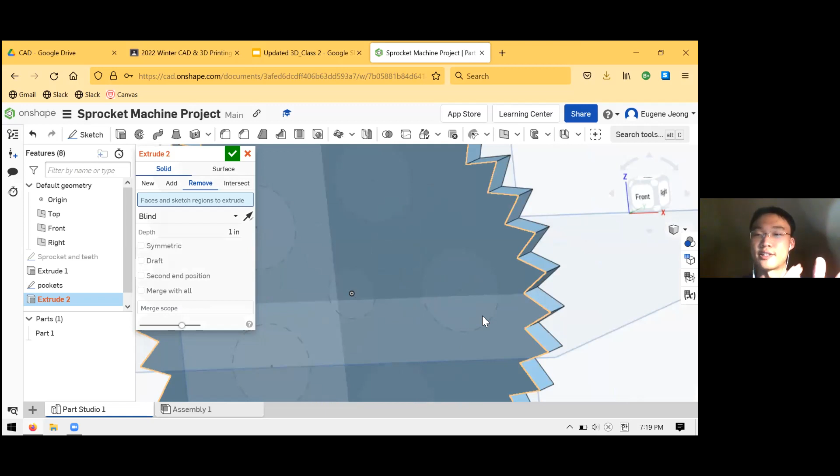And so if I go over to my sketch, you might have to turn it around. Whenever you look at a sketch and you see that it has these dashed lines, that often means that you're kind of looking at it through something, right? The sketch is actually behind the 3D object. So I'm just going to turn around. You can see now they're solid lines. And I'm going to click on my circles. Or you could also just click on your sketch that you made for the pockets.

Can you briefly do that again? Because I just finished my holes, it took me a long time because I couldn't figure something out. So extrude, we're opening it up, same old extrude that we've always used. And the only thing we're going to change is that we're going to go to remove. And then click on the holes? You can click on the holes. You can also just click on the sketch.

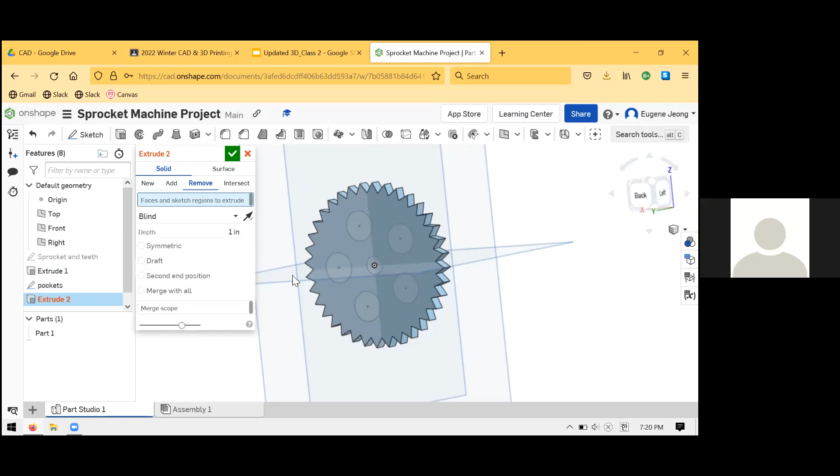And you might get a message that says selected tools and targets do not intersect. Not really an error message, but like a warning. So it's not going to do anything if that's the case. But what you can do is flip the direction of your extrusion so that it goes through the original part that you made. So you can hit this arrow. You can also drag this arrow like that. It still does nothing.

Or you can just hit this arrow here. And what you want is for the arrow to be going through your part. And what you'll see is that it previews your sprocket with holes in it. It just looks like it's been cut out. So do I accept that? So if you have something that looks like this, where the preview has holes in it, that's what you want.

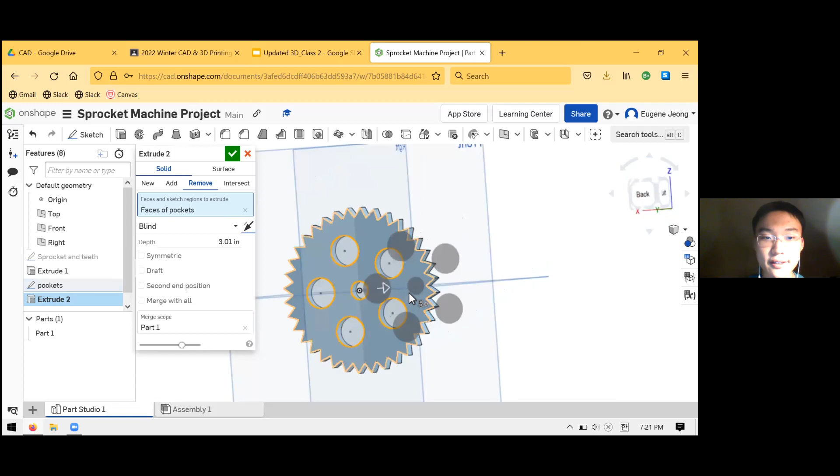My bike sprocket looks really weird.

And then one thing I'm going to explain here is what blind means, right? So up to now, we've always just used blind as our default setting for our extrusions. And what blind means is just that the end condition where your extrusion stops is blind. It doesn't care about what's already there. It just follows the number that you put in here, and it goes up to that number no matter what. It blindly goes up to 3.01 inches, or 5 inches, whatever number you put in there, it blindly goes there.

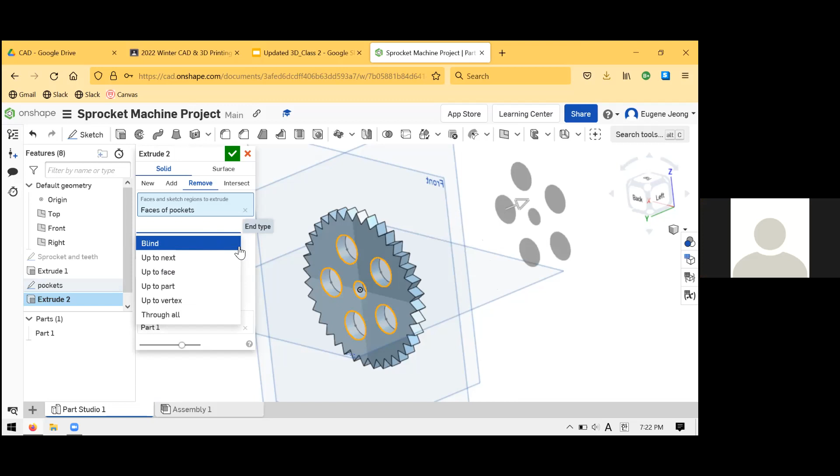There's some other options, and they are kind of self-explanatory. Wait, how did you name these sketches? I'll show you that in a second. But instead of blind, for example, you can do up to next or up to face, and that will just stop it once it gets up to the next interesting feature. Oh, I see, I found it. So instead of blindly going a certain depth, it'll look around, see what's there. It goes up to the next thing, which is the opposite side of the sprocket, and it'll stop there.

And the reason this is preferable sometimes over blind is sometimes you don't know how thick your sprocket is, right? Maybe instead of a sprocket, I'm going to make a long extruded sprocket-shaped tube, and it's going to be 10 inches long. And suddenly my blind extrusion isn't going to be long enough to cut through the whole part. But if I did up to next, it would just find the next feature, which is the end of the tube, and I'd be good to go.

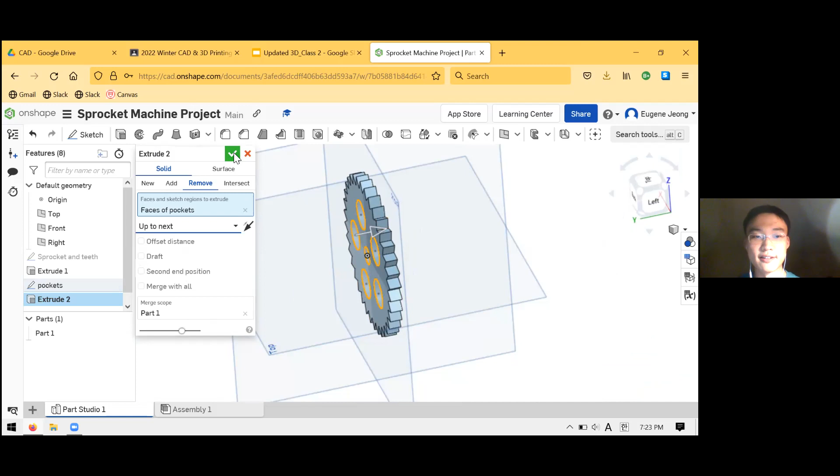So that's that. Basically, the only thing we changed is we are doing remove now, and that will do the negative of what extrusion does. Instead of adding material, it removes material. And so that's our finished sprocket. So if you have any questions up to this point, let me know, and I'll give you an overview of the next couple of things we're going to do, which is the remaining parts of this device.

So for the holes in the middle, it doesn't really matter what shapes those are, right? These pockets are completely up to you. You can make them whatever shape you want. For the one in the very center, I would recommend making it a circle, just because it's going to interface with another part that we will be making.

Yeah. So at this point, just take a moment, at the bottom of your tab here, I would go ahead and rename Part Studio 1. Rename this whole tab into something sensible like Sprocket. And as we create more part studios, it's going to be helpful so we know that it's a Sprocket instead of Part Studio 1, 2, 3, and so on.

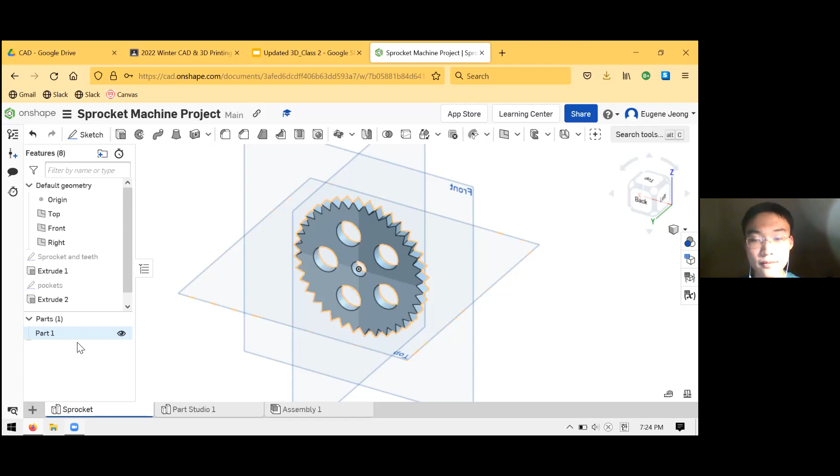And now we're going to create a second part studio inside of the same document. And the way you do that, you have a plus sign in the bottom left-hand corner of your interface here. You hit that, and you create part studio. And you can see that it automatically takes me to my new part studio.

What are we supposed to do in this one? We're going to make the remaining parts of our machine. Oh, the thingy thing. Yes. Wait, on that note, by the end, will we be able to turn the thing? Yes, that is the goal, and we will get there one way or another. Wait, will the outside rotate? It'll be such that you can click and drag the handle, and it'll turn the sprocket. Yeah, I know, but it will turn the sprocket. Yes. Okay. That's the idea.

So let's do a quick inventory of what we're going to need to make, right? The sprocket was the obvious one. Now that's taken care of. Handles. All right, handles, great. Part that holds the handles together, that goes through the center hole. Okay, we're going to have handles. We're going to have, I'll call that the shaft. The triangle thingy that holds everything together. Sure, I'll call that the base.

Is there anything else? I don't think so. That's the main thing. When you say handles, I'm going to treat the handle as just the part that you put your hand on, right? The grips. And then I'm going to create one more part, the things you put your feet on.

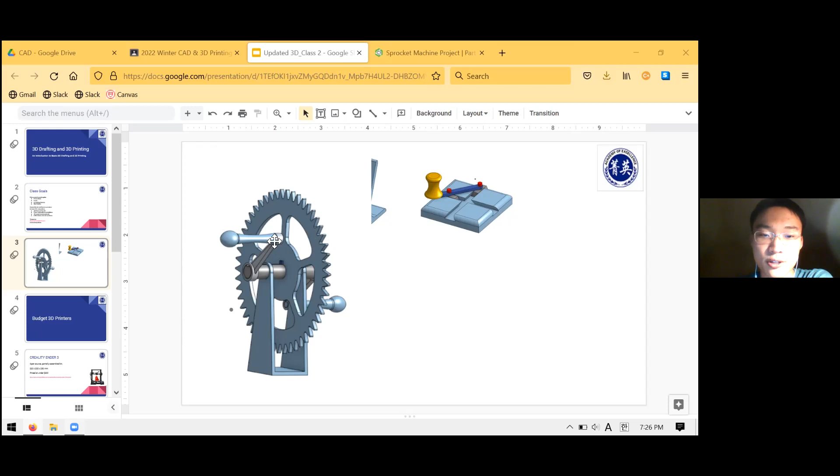I guess in this case, yeah, if you're thinking of it like a subsystem of a bike, you would put your feet there and not your hands, most likely. I'm going to create one more part just for this part that connects the shaft to the handle, and that's this link. So those things plus our sprocket are all the unique parts that are in our assembly here.

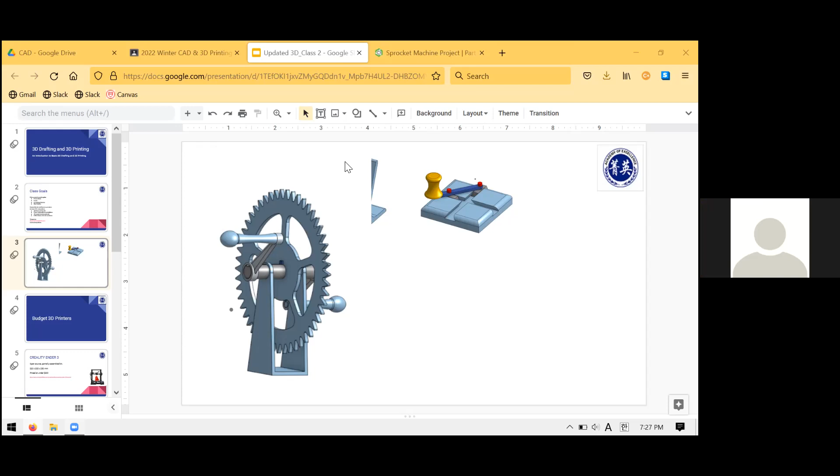Did you do a bike sprocket with every season? Like in CAD 1? I've done a few versions of this class and they've all gone slightly differently. I do try to do the sprocket first, and if we have time, we also do the ellipse trammel here. What about the house? I've never done the house with my classes or the phone stand. Is this really easy or something?

It's good practice, sure, when you're first learning how to do CAD, but in terms of assembly, I think it's more interesting to do something like this where you have some rotating components and such. And the ellipse trammel is definitely very interesting. I'd recommend thinking about this and trying it out, even if we don't get to it, which it seems like we probably won't.

So now that we have that list that I typed in the chat, you can look at this picture and think about how you would go about creating the models for each of these. Some of them will be pretty simple, some a bit more involved, but none of them will use anything that we haven't done so far. You don't need anything new, like a pattern, to be able to make these.

So if you want, take some time over the week to try and make these, and have a go at that. I'll try to push us to get these through pretty quickly, and then we can start working on the assembly. And I'll definitely make sure we finish this assembly for this class session.

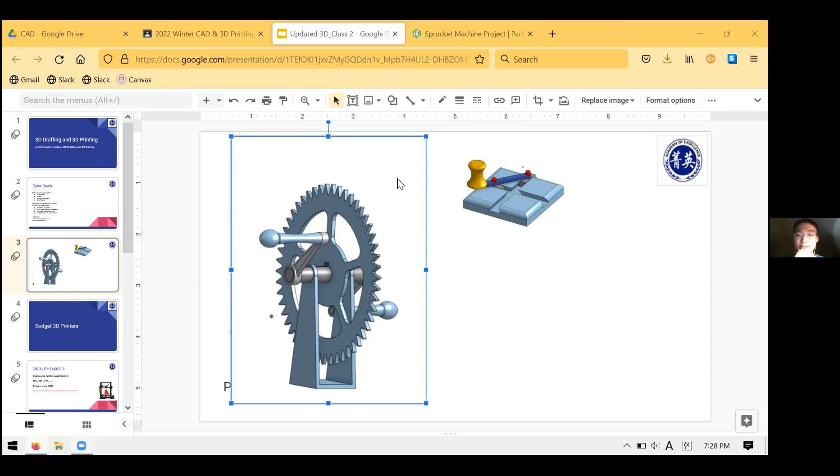But since we are coming close to the end of our time, if you have any general questions about the class or in general about things, yeah. I have a question. Do you have a 3D printer to recommend? So personally, I'm not much of a hobby 3D printer. I haven't done a lot of 3D printing on my own, but these slides, which I can post, have some recommendations for budget-level hobby 3D printers.

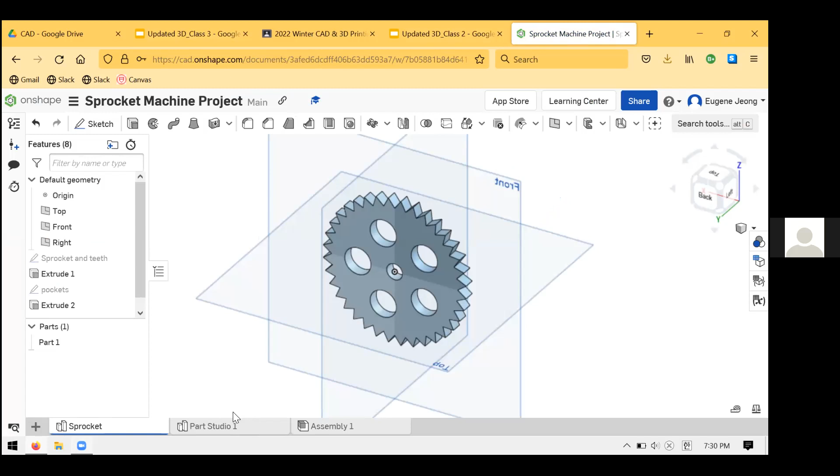Sorry for the interruption. Harry, are you from Maryland? I was in Maryland. I'm in McLean now. Okay, the reason I'm telling you is because we have a 3D printer in the center. So you can bring your design and come to the printer in our STEM center. Oh, okay. Thank you. Yeah, I can give you the address. Thank you. Sure, you're welcome.

Okay, well, with that, last call for any other questions. Only thing is, think about how you make the rest of these components: the shaft, the link, the handles, and the base. Come back with ideas next week, and we'll hopefully be able to knock out the rest of the components in one class and then start assembly in our last class, if not next class.

Do you have a question, Jeffrey? Yeah, for the pockets, what tool do you use again? For the what? For the pockets in the sprocket. Right, to cut them out, we use the Extrude tool. Just instead of add, we do remove. Oh, okay. And make sure the arrow is pointing into your sprocket rather than away from it like it is right now. So this way is what you want.